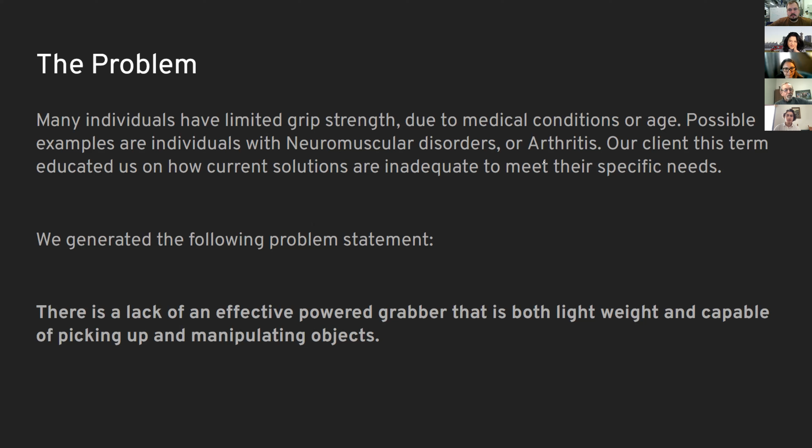It was important to us to make the product lightweight, comfortable, and able to pick up sufficiently heavy objects. The grabber is meant to aid those with physical conditions when picking up and manipulating objects that would cause strained movement and likely require external assistance. The value that a potential solution would bring to our client and possibly others motivated us to make thoughtful design decisions and meet other requirements as best as possible.

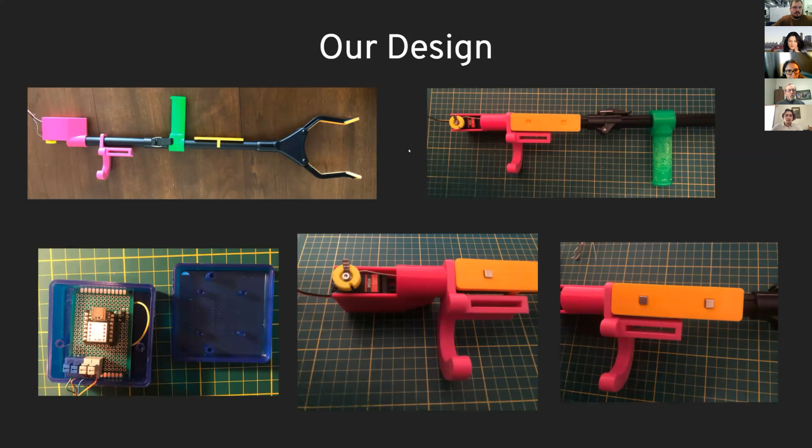So this is what our design looks like. We've adapted a reacher grabber on the market to be motorized using a winch. We have an ergonomic grip that consists of an elbow pivot point with a strap mount, as well as a front handle that the hand goes underneath. This configuration is designed for the right hand as the handle rotates around, and also consists of a magnetic mount for the button controller, a blue control box which houses our simple but effective control circuit, as well as our winch mechanism, which is able to close the jaw of the claw very effectively and easily.

So I'm now ready for a demonstration of our design. Here we actually have our claw all put together. Of course, this was designed for a client who has a much smaller arm, but I can show you how it's able to pick objects up. With the control panel here, we have capacitive touch sensors that you can just put your hand over and they light up. You can hear the sound of the motor whirring. Upon pushing the button, our claw closes like this and opens right back up. We tested it and it's able to pick up objects around 0.6 to 0.8 kilograms, such as this box here. It's able to pretty well pick it up.

We're pretty happy with our prototype in terms of its grip strength. Of course, we weren't able to properly test the ergonomics, but we do believe they would be comfortable and effective. We look forward to developing this product further on our own time if we get the opportunity. Thank you very much for your time. Do you have any questions?

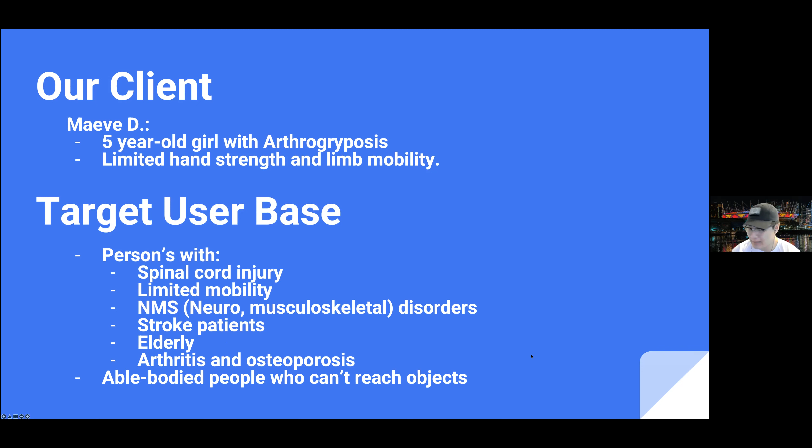So yeah, I have a list of all these people that this product could benefit. As well, if you're able-bodied and can't reach certain objects, you could also use this product, no problem.

So here is a 3D rendering of our product. Just a warning, this presentation is going to move fast, so please do soak in this design while it's on our screen here. I'll point out a couple of key features: there's our top cap, you'll notice that it's wider than the actual handle, so that people can slide their hand in and just have the arm be retained to their hand without much grip strength, because their hand's not sliding off.

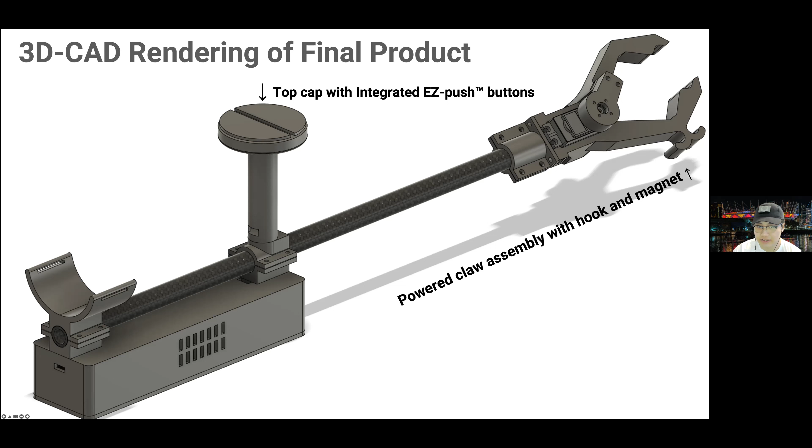There's 2 easy to push buttons up here that are semicircular shaped. Our claw assembly in the front has an integrated hook, so you can grab bags and push and pull things. There's also a magnet up here, so you can grab magnetic objects. Next, we have a rechargeable battery pack.

We'll talk a little bit about battery life later. We have some wrist support, and a carbon fiber tube that holds it all together, which is custom and very lightweight. So that was our design.

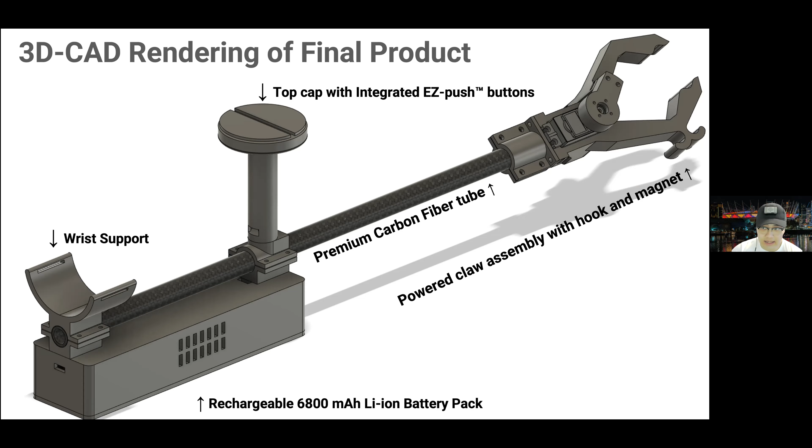This is all of our subsystem parts exploded, so you have a better idea of how this was actually built. Our team member Zitai had a 3D printer at home, so he was easily able to print all of this stuff out, and this is how everything was assembled. We can come back to this later if you have questions.

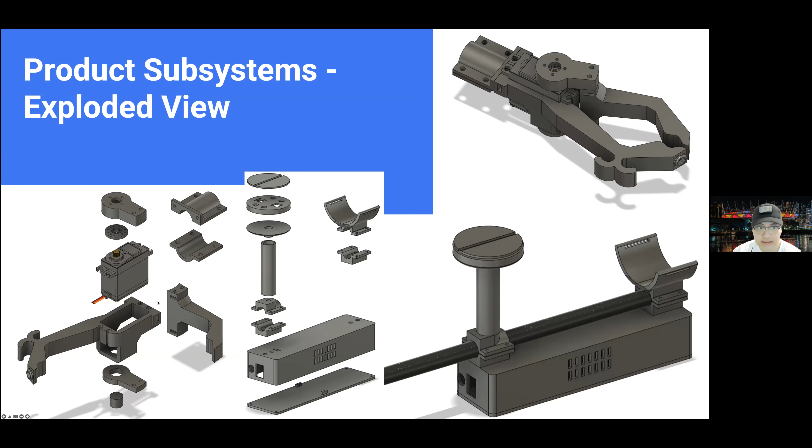Battery life is pretty great. It can stand by for 300 hours, or if you're moving the claw continuously, for 30 hours. That's our battery life, and it takes around 10 hours to charge. It's around the battery capacity of your phone, if that's a good reference.

I want to talk a little bit about what our onboard electronic system looks like. Zitai has drawn us a nice schematic here that takes up the major part of the screen. We have 2 18650 batteries wired in parallel that power our entire system. We have a battery management system to make sure we can charge those batteries using just a simple DC 12 volt barrel plug that you can buy on Amazon.

This charges the batteries up to the correct level and makes sure they don't discharge past a certain amount. We have an on and off switch to cut off power to the entire circuit. We have an Arduino Nano handling all of the logic for the system and the signal processing, and it hooks up to the 2 switches we see here, and connects to the claw.

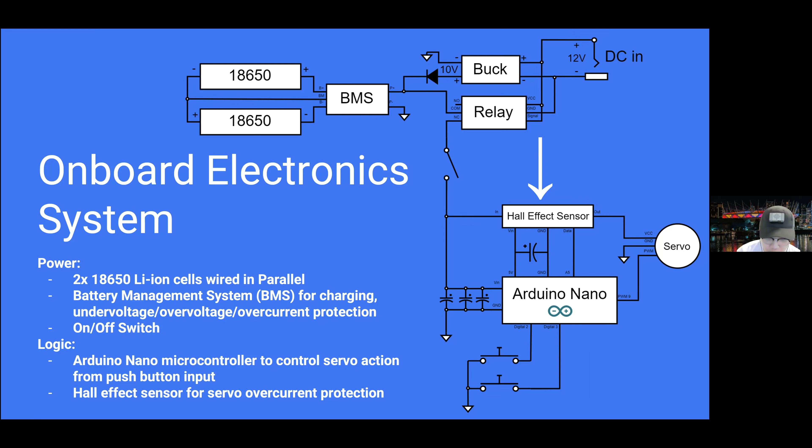We have a Hall effect sensor to make sure we're not providing too much power to the servo to burn it out. In practice this means the claw will only get so tight around an object before it stops providing current. So that was our onboard electronic system.

So with that, we're going to jump right into the live product demo, and I will stop sharing my screen.

There we go, and so Zitai will take it away. Hello, can you see? Can judges see me? Okay, great. So here's our actual product made here.

We asked Maeve what color she likes, and she said pink, so we printed it in pink especially for her. My hand is a little bit too big, but it just barely fits inside. We have a wrist wrap to secure it to my arm so it won't fall off in any way, and we can turn it on.

We have 2 big buttons here. We can close it, open it, and we have different modes for controlling it for fine control if she wants. As mentioned, we have a magnet in the tip. Here I have a small metal wrench, just imagine this is a metal toy. She could pick it up using the magnet very easily for small objects.

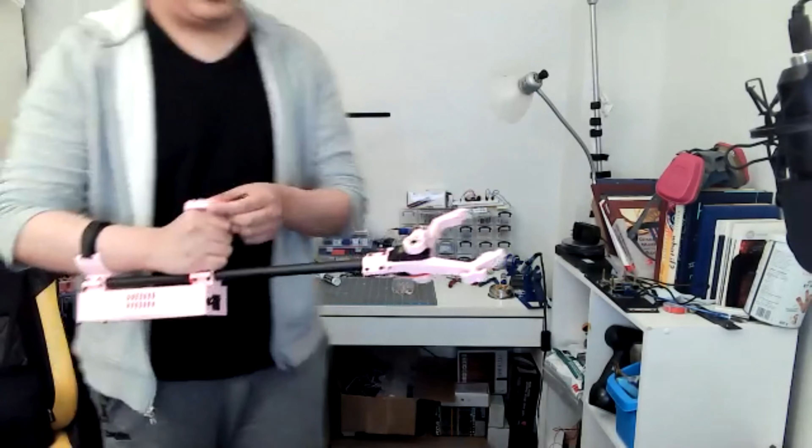Yeah, here's up here. We have our power switch here and the DC barrel jack for charging. Yeah, that's the system.

Cool, so now we'll open the floor up to some questions if any judges want to jump in. I have a question: it looks like the extended arm is quite long. Can that be shortened?

Oh okay, so is there a chance to shorten it? Yeah, we can actually shorten it by loosening the screws here, and we can push the whole pipe this way, so it can be shortened.

Can we add a motor to make it adjustable? We actually discussed this with our client, and we think that will add too much unnecessary weight. Okay, yeah, good, thank you. No problem.

Hey guys, I just want to say, first of all, amazing presentation. Kudos, great job, lovely background. The way you guys set that up and the way you explained it was really, really good. And even you took the client's color into perspective, which is amazing.

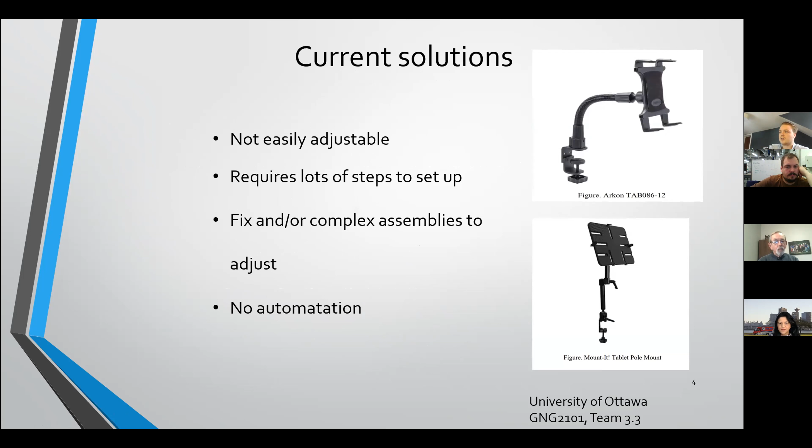So these are some current solutions we found on the internet. Most of them were arm-type styles adjustable by either pins and screws, or a gooseneck type solution. We talked about this with the client, and it wasn't really ideal because they're complex, can't be adjusted easily, and aren't automated.

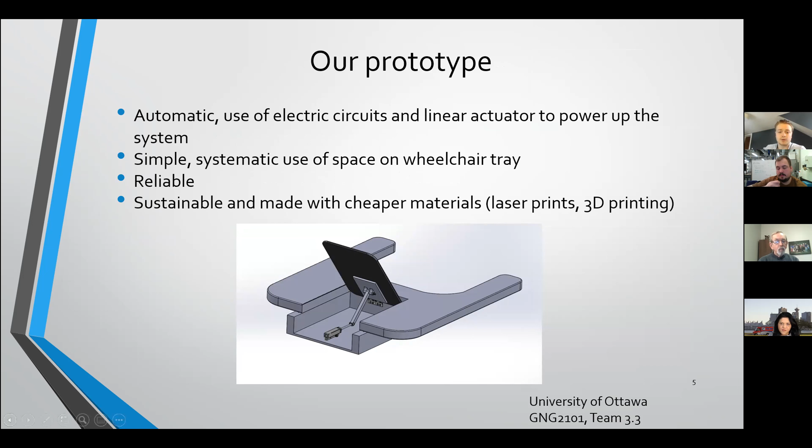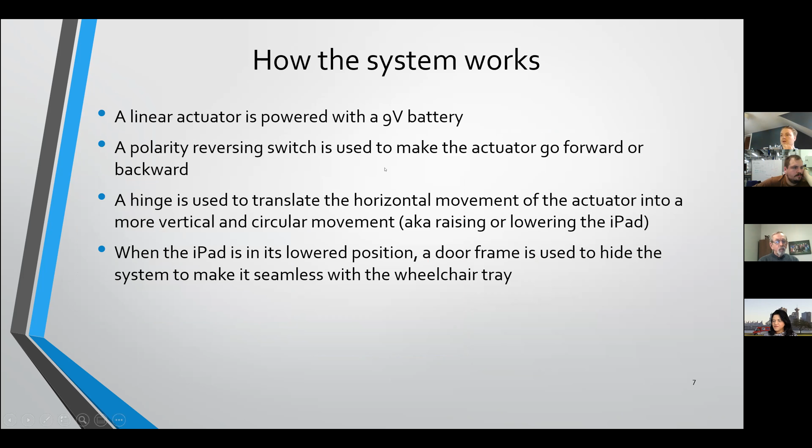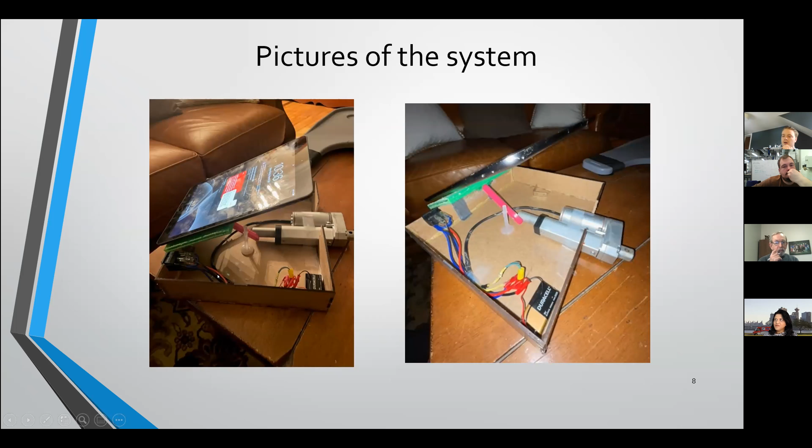Here's some other pictures without the tray. So the actuator, the switch, the battery, the wiring, and this box were laser cut out of MDF material.

And now I'll just show a quick video demonstration since I'm running out of time, of the actual system working up and down with the iPad. So that's the iPad going up from the actuator and the arm that's pushing on the tablet holder. And then we should see it go down as well. And that's it.

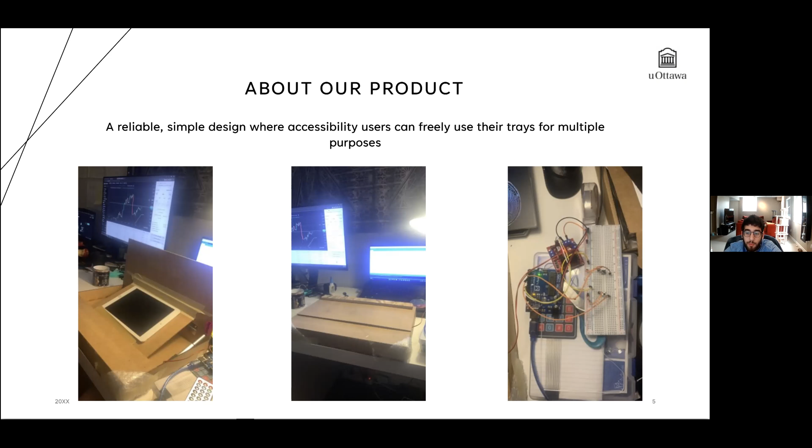Yeah, sure. So for our target audience for this product, it's accessibility users, their families and caregivers. It will also serve as a good alternative to complex and expensive attachable tablet holders that can hinder or restrict the user's view or fail to satisfy their needs. With our product, most users will be able to gain a sense of self-dependence, which is crucial to building confidence and giving them a sense of responsibility. Moreover, it will save caregivers or family members the time to install or dismount gooseneck arm devices, especially during travel. This new tray design can be easily tucked away or moved off the wheelchair.

There's multiple reasons why this is important for us. We found that it's for comfortability, usability, and safety. It's comfortable to use the product on a daily basis. It should be easy and simple to use and put in a position that will not harm the user.

For some of the product features, we have made it easy to use with a simple press of a button. Once the tray is turned on, you can notice that one third of the tray remains closed, serving as armrest or wrist rest for the comfort of the user, but it also helps people that want to see what the users are doing be able to see them, as the tray will not hinder their vision. You can also see that we've put padding on the sides of the tray so that sharp edges won't harm the users.

We also decided that after finishing up the tablet, it can remain stored inside of the tray, so you have a place to store the tablet. For things we want to do for the future, we would like to implement more angles of motion, include preset positions so that the user can come back to the position they're used to and they like. Another thing is to add a remote control, so it's even a little easier than just pressing a button. And finally, create an independent tablet holder.

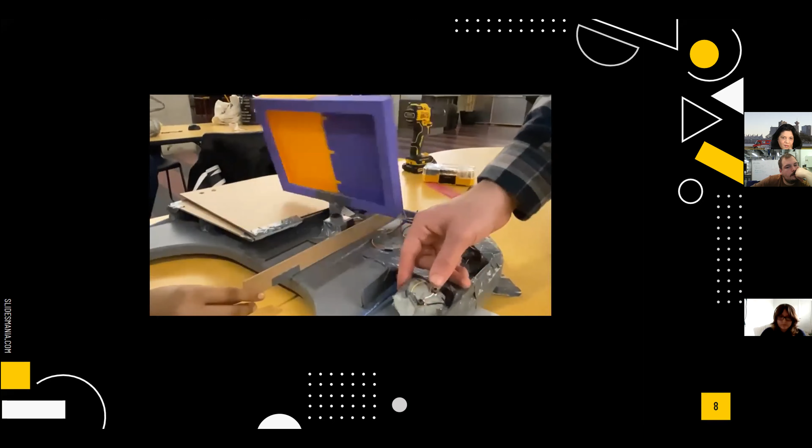And... one second. That's it. Thank you for listening. Any questions?

Great job, guys. Lovely presentation. Thank you. So, a quick question on the battery life.

Is this motorized, and is it running on a certain battery life, or is it rechargeable? I believe it is running on a 9-volt battery, so we are working on a battery that has a limited lifespan. I'm unsure of how long it actually functions for, but I believe it's for a somewhat reasonable time.

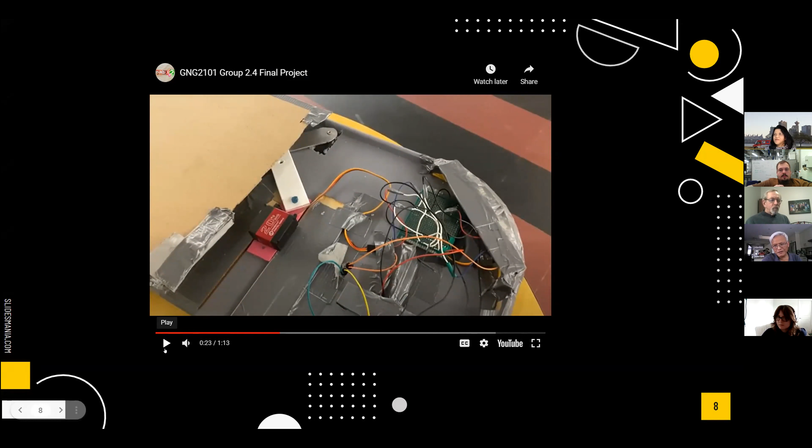Do you have any damper to dampen it when it's closing? Any what? A damper, damping the motion, so it's not just flipping up because your tablet could fly somewhere else. That's closing, true. Yeah, so is there any damper at all? I'm a bit unsure what you mean by that, but we do have it built in a way where there is tape to secure it and make sure it doesn't go flying. And it's also within a case, so the case snaps to have the tablet in place. So it can't really go flying, it's kind of locked in.

Okay, good, thank you.

And I just want to add that I really love the presentation. All the features were really well explained, and I think it's a highlight. I really like the way that you explain it. You put what it's in the market, the functionalities that were key for your design, and I really understood it very, very easily. So great job.

Thank you. I'd like to take the opportunity to compliment all three of the groups that have worked on this project. I need to give a bit of background because unfortunately the real client for this is unable to be there. It is representing the therapists who work at the preschool and some of the schools that are run under the CHEO organization. And one of the issues they face is children love their tablets. They want to use them all the time, but it's lunchtime and they need to put the tablet away.

One of the problems is that if you have many students and only a few teachers, you're busy running around with tablets falling over—tablets need to be set up. I worked as a volunteer at one of those schools. One ideal solution would be to allow the child to have control over their own tablet on their tray, eat lunch, open their own tablet. That's the ultimate goal, and these products, all three of them, have gone a long way towards solving that problem. Great compliments to all three teams.

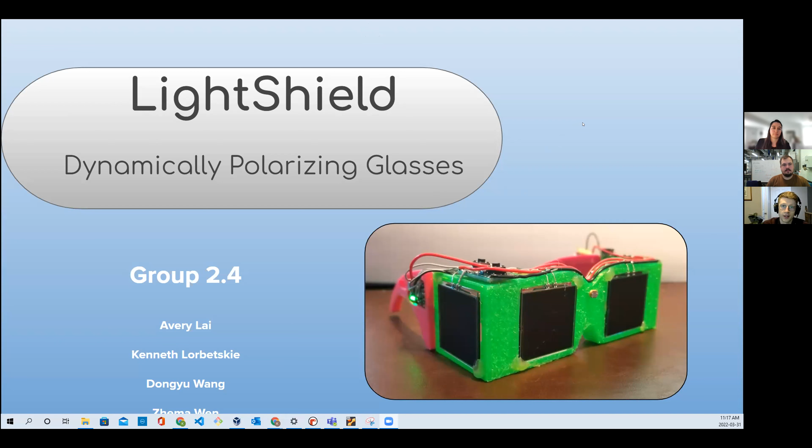So what's the problem? We've been working with our client Kate from the Canadian National Institute for the Blind to design a product for people with extreme light sensitivity. As it stands, in bright lit environments, it can cause pain and discomfort for people with light sensitivity. We found that they typically need to carry multiple pairs of sunglasses with increasing levels of tint or darkness in order to feel comfortable.

We've found this is fairly inconvenient because they have to carry around multiple pairs of sunglasses, and it takes time for them to take them on and off, not to mention they need to have hands-free to do this. So in order to design a better solution, we've identified some core requirements.

Namely, our solution needs to have adjustable tint lenses, meaning the lenses can go from light to dark automatically, adjusting to ambient light conditions. The glasses need to enclose the eyes—this was a big requirement since we don't want light to get in from the top, bottom, or sides, as this can cause discomfort. Finally, we need a fast response time, meaning the lenses go from light to dark quickly when lighting conditions change, to reduce discomfort.

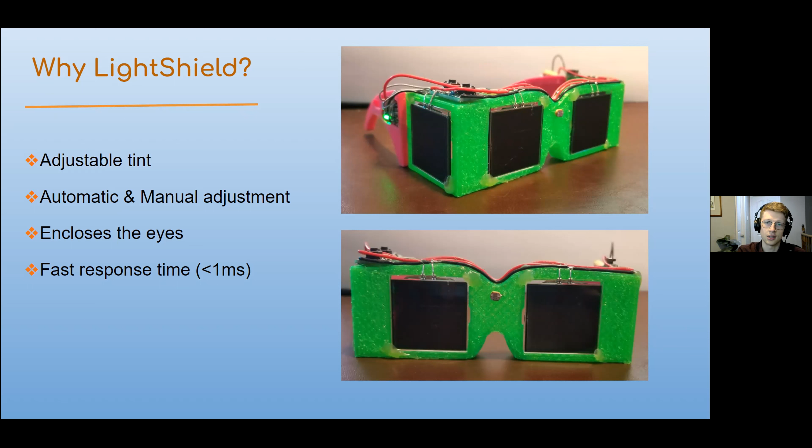The glasses wrap around the eyes to not let in any light from the top, bottom, or sides. It also maintains the peripheral vision of the user, which is a big requirement, since if it just blocked light they wouldn't be able to see what's going on the side. Finally, the system has a very fast response time of less than a millisecond, so it can quickly respond to changing light conditions and adjust the tint accordingly.

So now I'll demonstrate the product. I'll stop sharing.

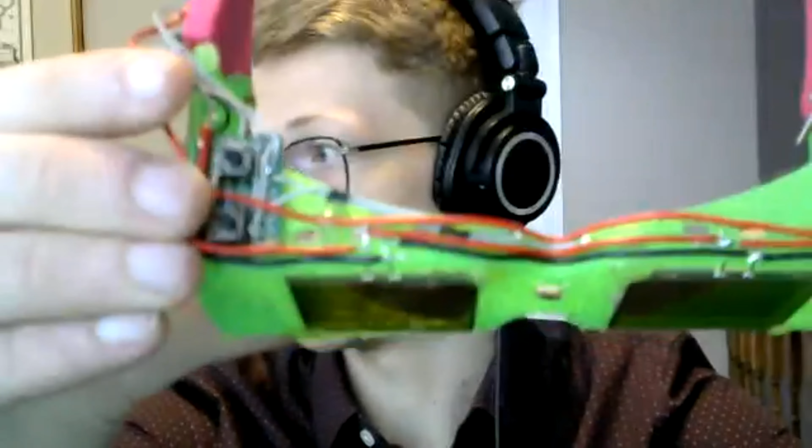So here are the glasses. As you can see, there's a light sensor here. If I cover it, you should see it gets lighter. So if you go from a light environment to a dark environment, the glasses will automatically adjust the tint accordingly. We have push buttons on top that allow the user to manually make them lighter, make them darker, and that's going on this side as well.

And it's all being controlled by a microcontroller, and it has an onboard battery, and the overall battery life right now is about 9 hours. However, there's a switch that can let you turn off the device if you're not using them, which will help you save the battery. We originally designed it to have a larger battery, which would have given us 13 hours, which would last for an entire day. However, they weren't in stock, so we had to go with a smaller battery.

And then it can be easily charged with micro USB, so you can charge it overnight so that it's ready to go for the next day. So yeah, that's our product, and I'd be happy to answer any questions on that.

If you don't mind holding the prototype one more time above, I just want to see the thickness of the microcontroller, if you don't mind. Okay, it's not too clunky. Yeah, and if we were moving this into production, we wouldn't use this board. We'd shift it onto a PCB, and that would really decrease the footprint.

Makes sense. No, amazing, I can see the usability of it, so it's pretty cool. And you said you can even pull it out and do a USB charge towards the end of the day? Okay, that's cool. Yeah, there's a USB charge port, if you can see. So you can just plug it in, and since it's a small battery, it only takes about half an hour to an hour to charge fully.

Okay, so it's light sensor based and also button based if you want to manually do it. Exactly. So it'll automatically use the light sensor to adjust to the lighting conditions. And if you find that you would prefer it to be a little bit darker, you can use the buttons to make it a little bit darker or lighter. Can you set your preference by any chance, or is that not a feature? Yeah, no, you use the buttons to adjust it.

One other thing we noticed throughout the design process, we were specifically designing for our client Kate, but we also identified that this product could be useful for other use cases as well. Like if you're driving, something like this could be valuable. If you go into a dark tunnel, you'd want the sunglasses to get lighter, and then when you come out, if it's really bright, to have it return to that.

So that was another customer segment that we could identify if we were to move this into an actual production product. What does it do with respect to moistness? Like say, for instance, you're in a steam room—does the sensor work for rooms like that? That's not something we tested necessarily. I think as long as it's not super steamy, I would imagine that it should respond fine.

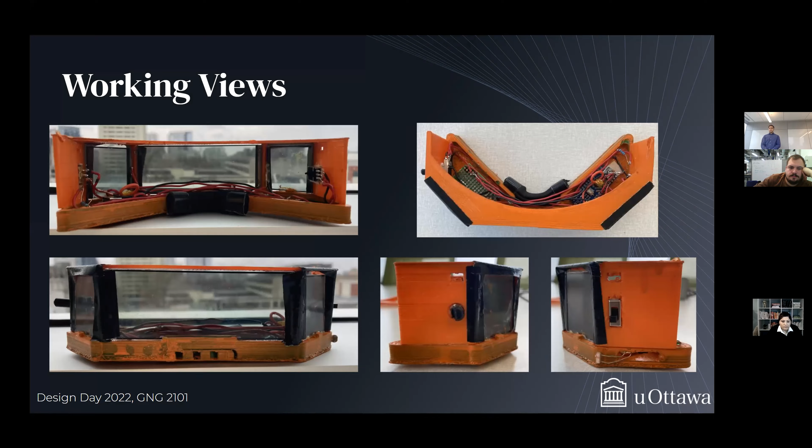For our future work, we decided we wanted to move away from 3D printing, which was how the frame was manufactured. This is because doing so can give us better seals around the client's face and head. Per each individual client, you could mold their face and create proper sealing from light coming in at the top near the forehead or from underneath the eyes, as well as between the screens in the frame. We do have a little bit of gaps in those spaces, which we were able to fill in, but if we could properly mold a tighter fit, that'll improve our frame design.

Additionally, the electronics inside the device could use some insulation with their connections to avoid any accidental shorting and stuff like that.

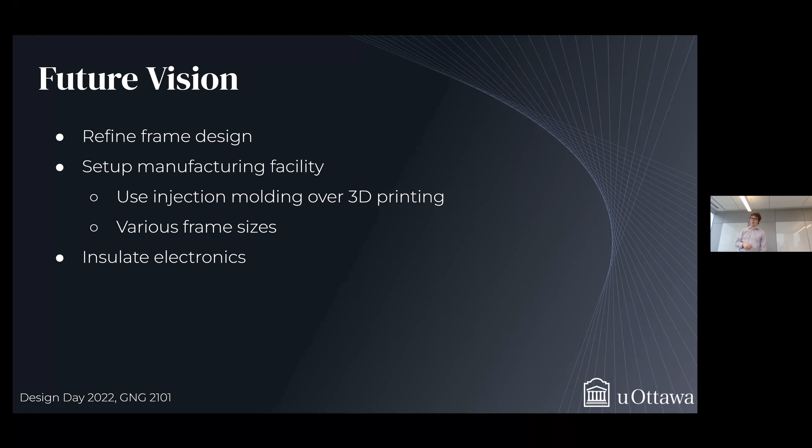So right now, we're going to get our teammate Nadej to do a live demonstration for you. As you can see from the lenses, they are flickering a little bit. Full disclosure, they were working very properly and adjusting correctly with the potentiometer. However, upon integration with the assembly of the frame, one of the connections is a little faulty, and that's why you see that flickering. But it does work, and we are currently working to fix this issue. Thank you for your attention.

This is our presentation. Do you have any questions?

So I have a quick question. Are you guys just affecting the tint, or is there actually some polarization involved?

These lenses don't affect polarization in terms of blocking out UV rays specifically. However, our client is affected by all types of light, not just UV light, so brightness is mainly her issue. These lenses limit the amount of brightness entering the lens, but they don't come with UV protection. However, our client does wear contacts that she could wear alongside these lenses, which would come with some UV protection as well.

Yes, you're just affecting the tint, the amount of light that's entering, and not pulling it through a polarization filter. It's not filtering any UV light specifically.